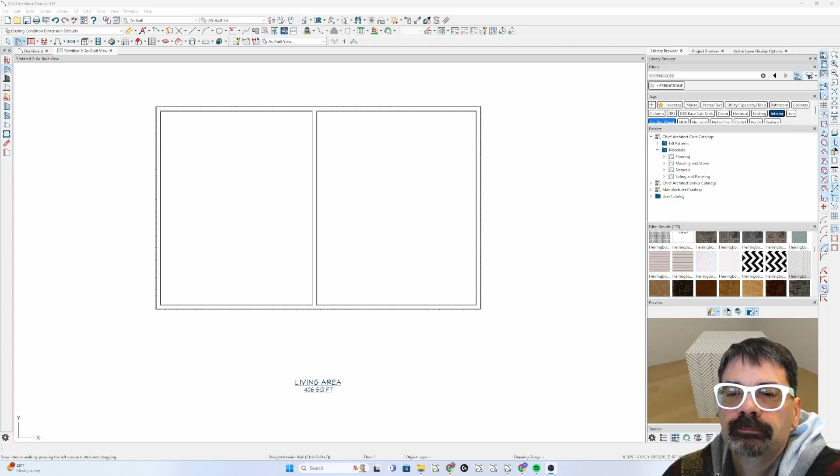I want to do a quick tip today for Tech Tip Tuesday on how to do staggered wall framing. I've got it set up here with 4 exterior walls and 1 interior wall.

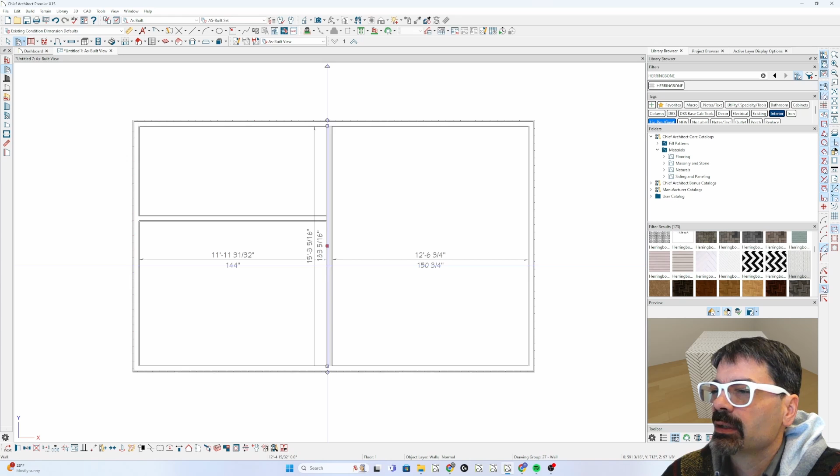I'm going to open this interior wall and go to wall types to define that wall type, and copy this wall type. Let me back up a couple steps. I'm going to draw one more wall type, double click on this vertical wall, go to wall types, and define this. If I don't copy this wall type here, that will change both interior walls because they're both wall type interior 4 exist.

So I'm going to copy this wall type, and instead of calling it copy, I'm going to call it staggered.

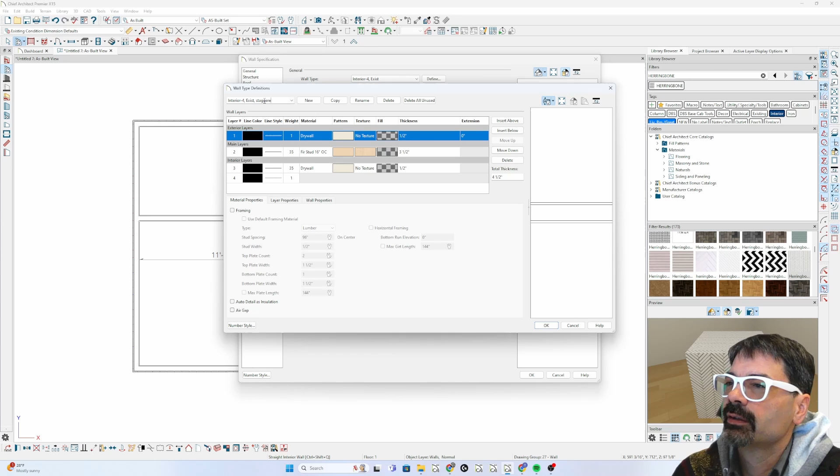Next, I'm going to select this first stud 16 inches on center and insert below. I could have done insert above, but insert below works as well.

Last but not least, I want the thickness of these layers correct. The question on Facebook was wanting a 2x8 plate, so I'm going to do 7 1/4 divided by 2. That's 3 5/8, so I'll make both of them 3 5/8.

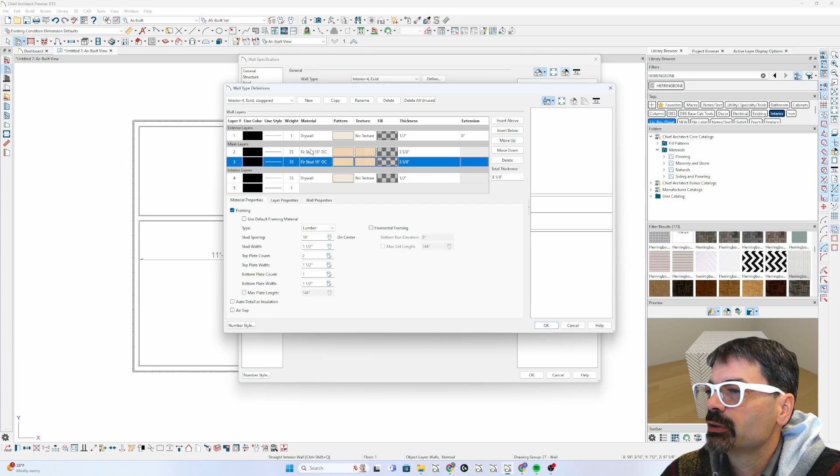I've got my 2 stud layers, 3 5/8 wide. Click OK, click OK. And that means my stud face to face here is not center. Stud to stud is 7 1/4.

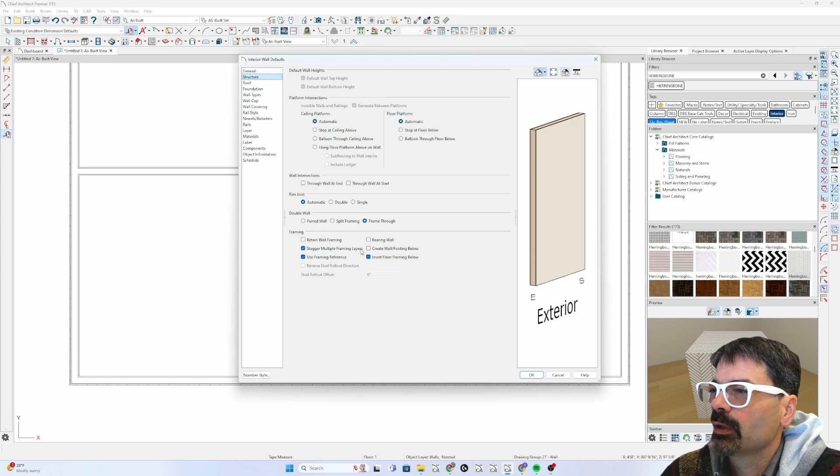Then I'm going to just check my defaults, walls, interior wall, go to structure, and make sure stagger multiple framing layers is selected. You do the same thing if you're doing exterior walls as well - structure, stagger multiple.

Now I'm going to select this wall, and for sake of giggles, I'm just going to frame this one wall here. Build framing for selected objects.

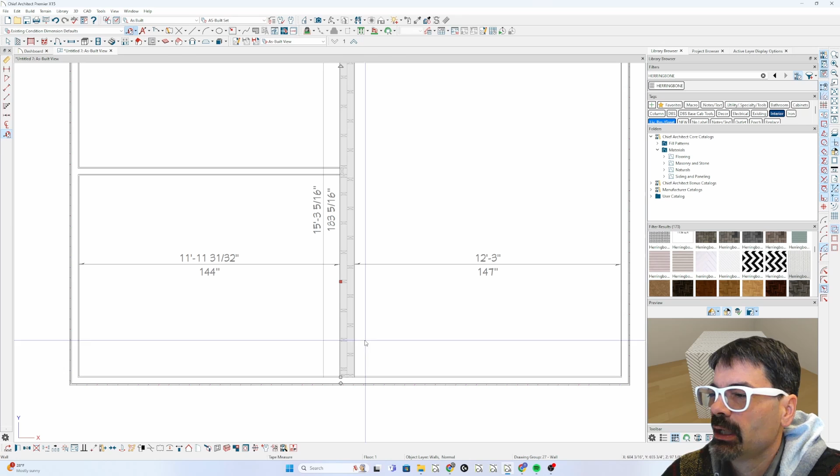Now I'm going to take a section of this framing, and you'll see I have plates, top and bottom, 2 layers of plates. So I'm just going to delete one, select this plate and drag it over. Same at the top - delete these double plates and drag them over.

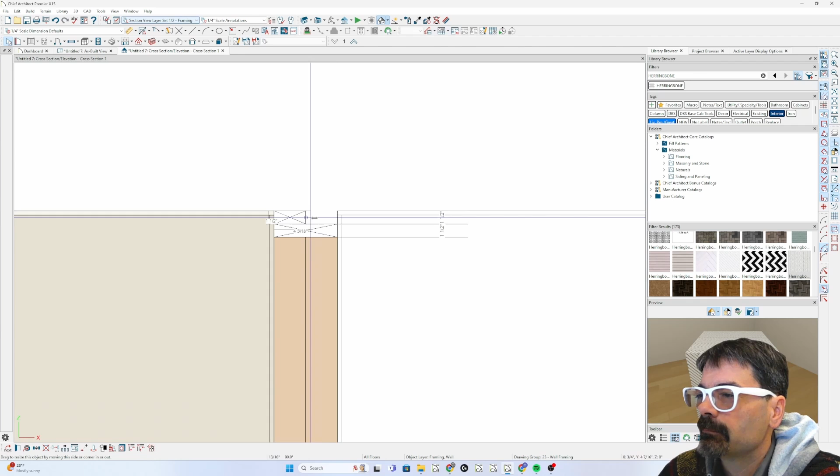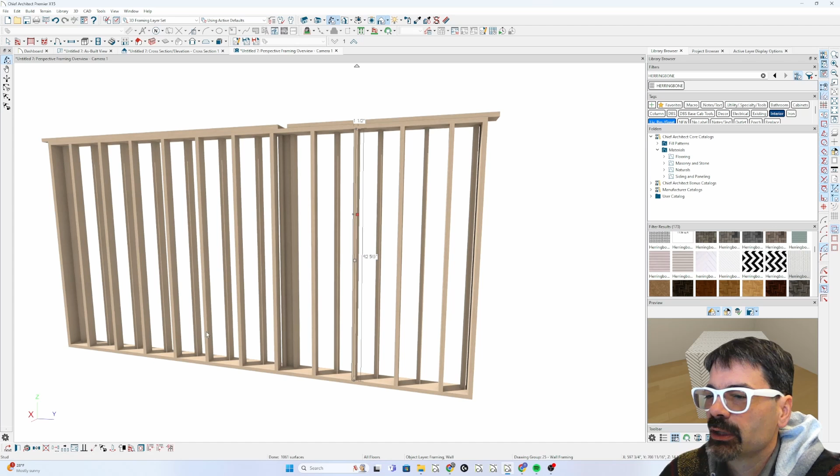Now when I take my framing perspective overview, I'll have to do the same over here. That's fine. Now I've got my double top. Now what's weird is you do have 3 5/8 studs here - you might have to change those, and I could manually change those.

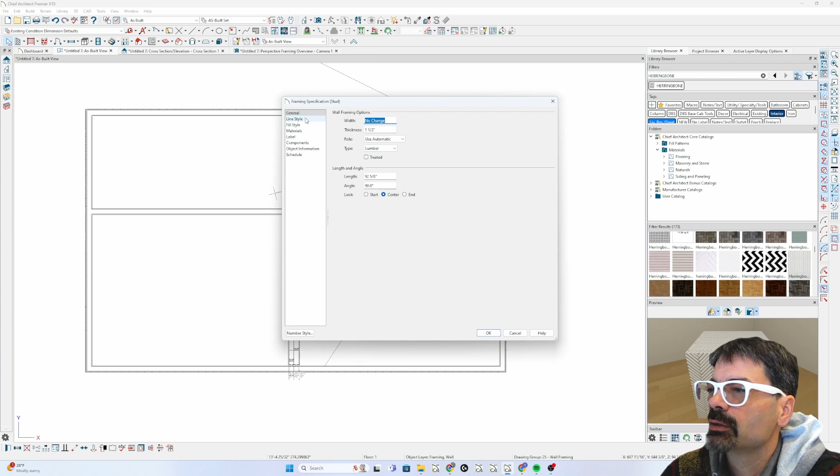Select contains - 28 objects are selected, I can't. Options. It automatically is going to make that. I can't select that stud and make it 3.5, unless I do each individual stud like this. I have to do every stud.